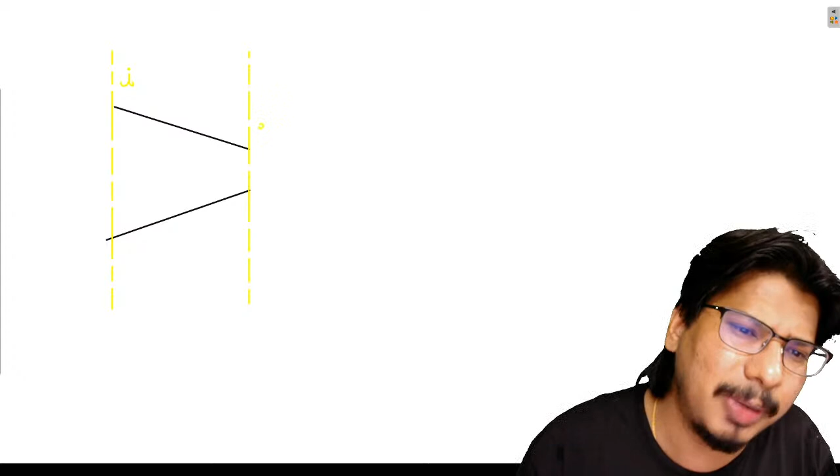Now let us suppose we are having flow through this converging duct, and we are having isentropic flow. Let us suppose we are having isentropic flow. Now listen carefully, my friends.

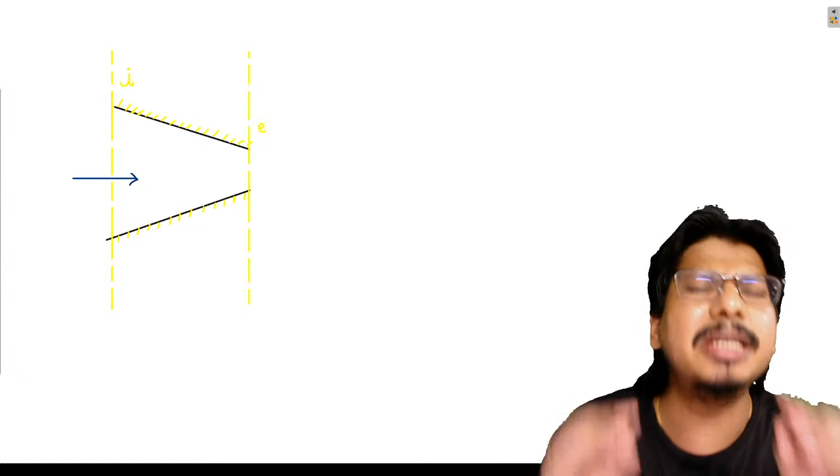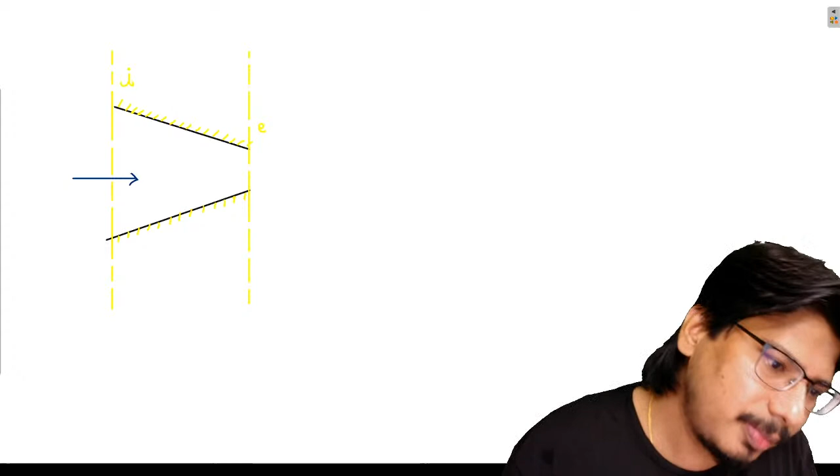For this converging duct, are you able to understand? Where I am having the minimum cross section area?

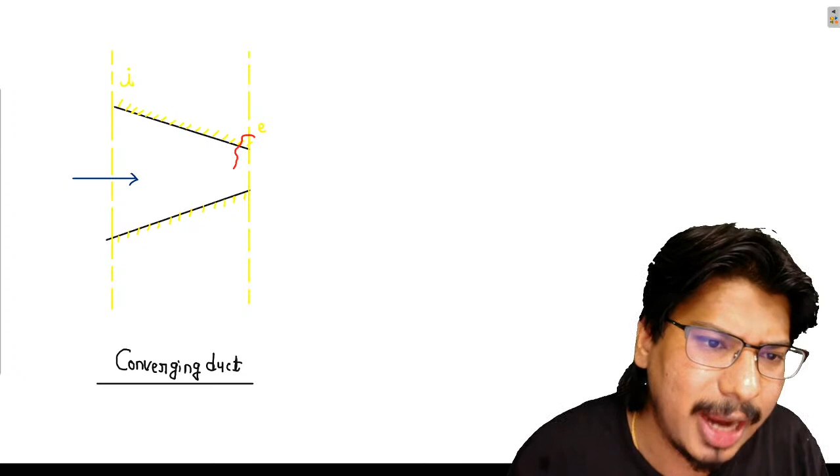Even a blind person can say here at the outlet, at the exit plane of the nozzle, at the exit plane of the converging duct, I will be having the minimum cross section area.

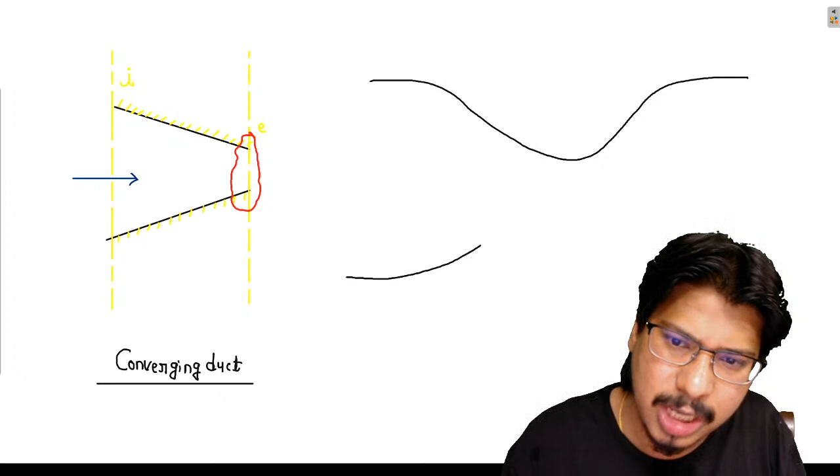Let us discuss one more thing, please observe carefully. Let us suppose I am having converging diverging duct. Look at here. Let us suppose we are having the converging diverging duct.

Now look at here, my friends. You are aware of this. Look at here, the beautiful concept. This is your inlet plane and this is your outlet plane, exit plane. This is the inlet plane of the converging diverging duct.

Observe carefully. This is your exit plane of the converging diverging duct. Any intelligent student of the class, for this converging diverging duct, where will the minimum cross section area occur?

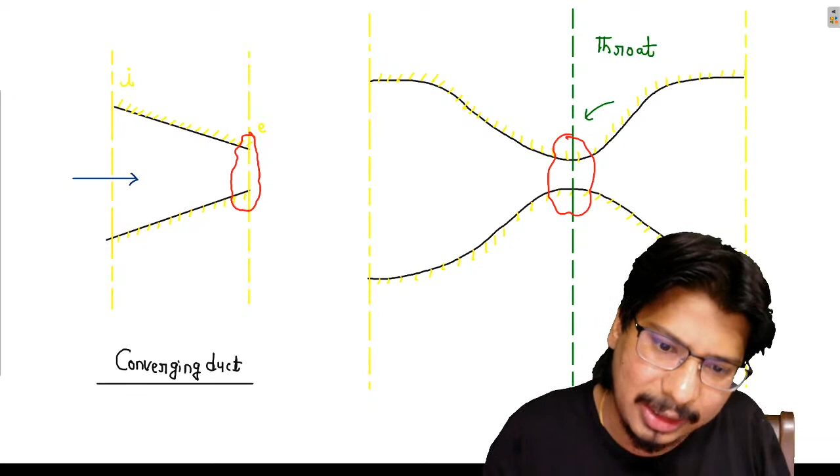Now listen carefully, my friends. What does the formula say? Formula is saying I will be having the maximum mass flow rate through this converging duct or through this converging diverging duct.

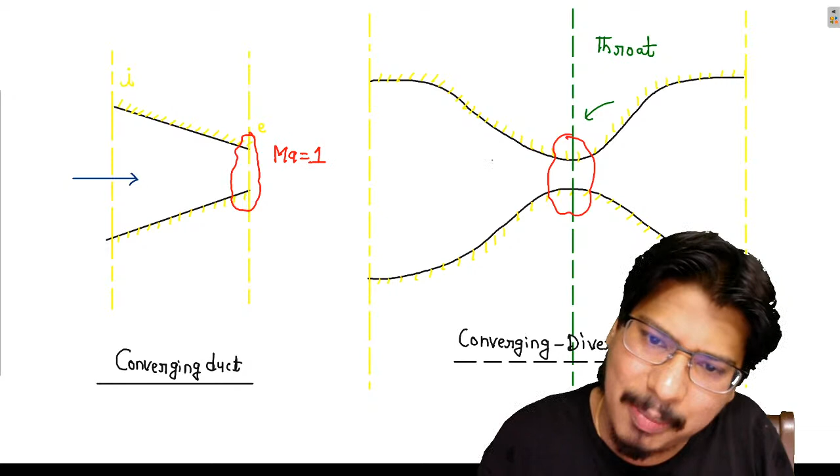If the Mach number is 1, if Mach number is 1 at the minimum cross section area, that means if I am having Mach number equal to 1 over here for the converging duct, or if I am having Mach number here for the throat, I will be getting the maximum, whatever the mass flow rate will be taking place through these ducts, that will be maximum.

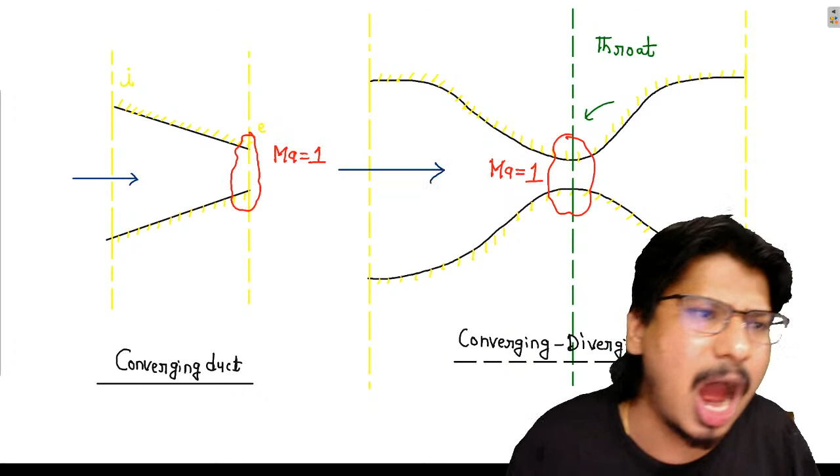I hope everyone is clear. We want Mach number to be 1 at the minimum cross section area.

Bolo re baba, bolo re baba. Good evening, good evening, good evening. Are you clear till here? Yes, Komal, very good. Nikhil, Suresh, Raju, very good beta. Nitesh, Naveen, Shivam, excellent. Namaste. Vikas, are you clear till here?

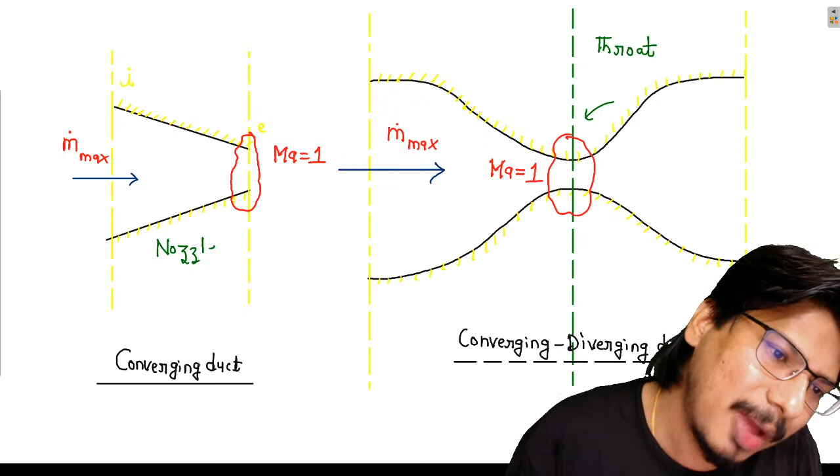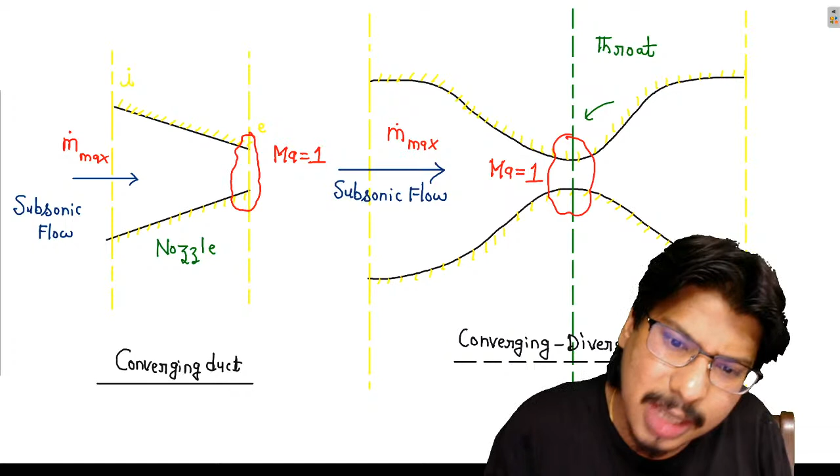If I'm having the subsonic flow here at the inlet, maybe this flow is coming from some reservoir, or I'm having some subsonic flow, then this will be behaving as a nozzle. Similarly here, if I'm having subsonic flow at the nozzle, then 100% this converging duct will be behaving as a nozzle.

Any intelligent student of the class, this diverging duct will be behaving as what? If at the throat, maine bataya hua beta, if at the throat I got Mach number 1, then this diverging duct will also behave as a nozzle, because here also velocity will keep on increasing.

Velocity nahi beta, dhyan se dekho, ye diverging duct - isiliye maine poocha aapko, don't be confused beta. If I am having Mach number 1 here, agar ek baar yahan throat pe Mach number 1 ho gaya, then the velocity will keep on increasing, and at the outlet I will be having supersonic flow. Maine bataya hua hai beta, ek baar dekhna dhyan se.

Supersonic flow, yes or no? I hope you are able to recollect beta. 100% velocity will keep on increasing, and this diverging duct will be behaving as a nozzle. Preetam, welcome. Chalo beta, now the most important thing.

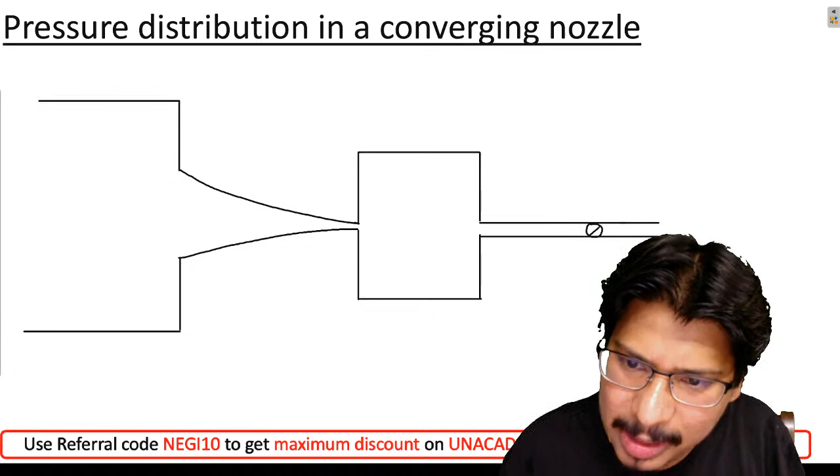Now listen carefully my friends, and let me say here I am having some valve which can regulate the flow. Yahan par mere paas koi valve laga hua hai, and here it is discharging to the environment. Yahan par aapka environment hai, here it is discharging to environment. Now listen carefully. Let me say this nozzle is completely insulated. Beta dhyan se dekhenge.

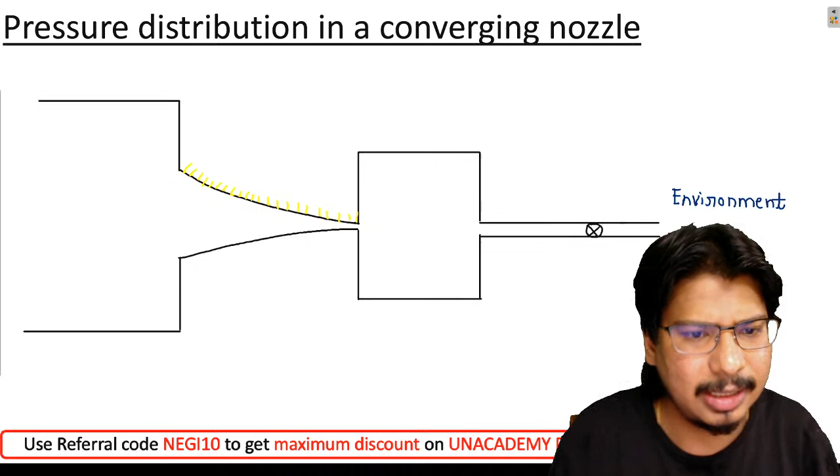Let me say this converging duct is completely insulated. I am having the steady flow. Don't think mass flow rate will be maximum at nozzle. Whatever the mass flow rate I am having at the inlet, same mass flow rate I will be having at the outlet also. Don't be confused. If I am having the maximum mass flow rate, same maximum mass flow rate will occur throughout every cross section, everywhere that same m dot max will occur.

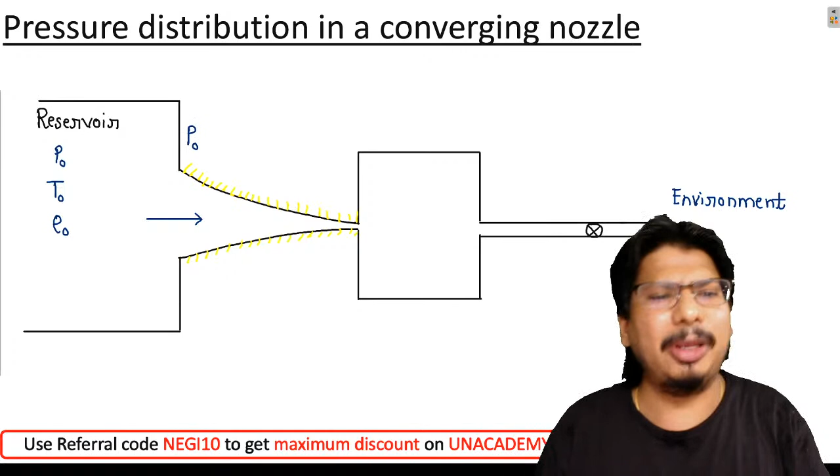Now let me say the pressure at the inlet of the nozzle will be approximately P naught only, you can call it P naught. Now let me say the pressure at the exit plane of the nozzle is PE.

Let me say the pressure inside this tank, this is some tank kind of thing, it is having some pressure, let me say back pressure PB, and this is the valve which can control the flow.

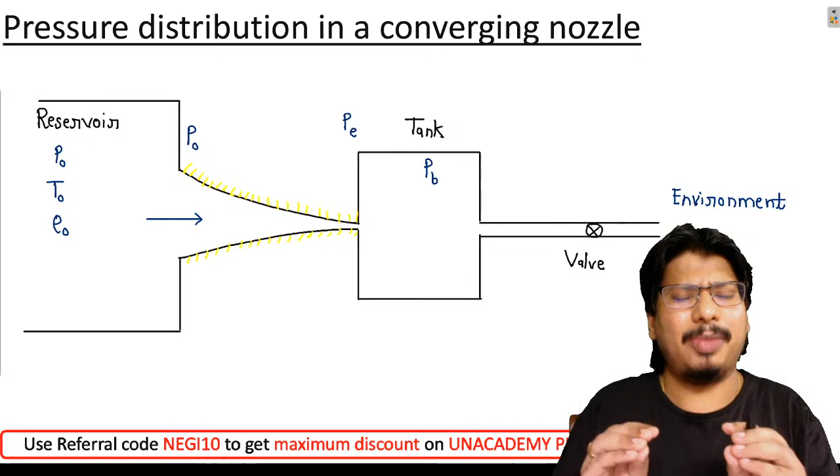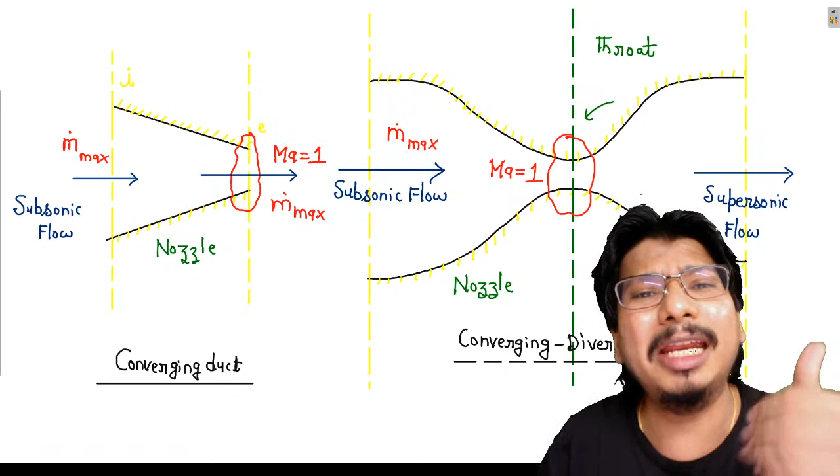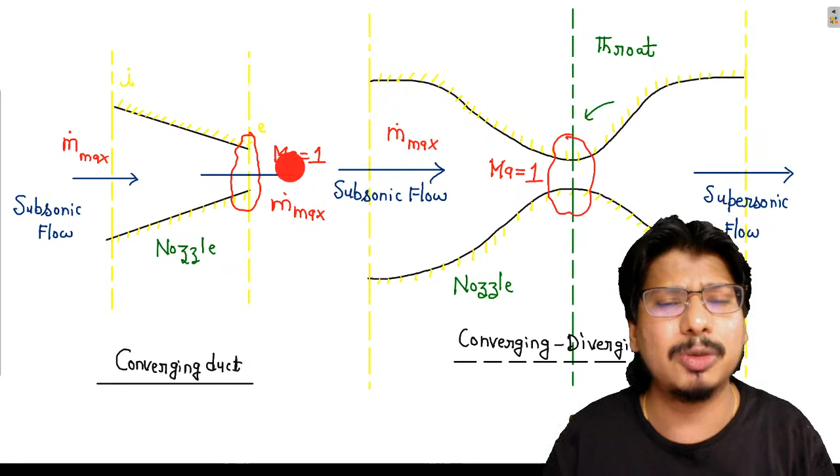Now see how velocity is maintained. I said, if you are having lesser values of Mach number and you keep on increasing the velocity, what will happen? Mach number will keep on increasing. Let us suppose we are increasing the velocity such that the Mach number at the outlet of this converging duct, at the exit plane, becomes 1, then I will be having the maximum mass flow rate.

Let us suppose this valve is completely closed.

What is your observation? Do you think there will be any flow? If the valve is completely closed, do you think there will be some flow? Please confirm me, will I have any flow through the converging duct?

This converging duct will behave like a nozzle right now, because I will be having very low velocities at the inlet of the nozzle, so 100% I will be having subsonic flow at the inlet of the nozzle, or literally zero velocity, right? So I can assume this converging duct will be behaving as a nozzle.

So tell me one thing, what will be the flow? Flow will be zero, there will be no flow. There will be 100% zero velocity.

Let me say this plane is representing the inlet plane of the nozzle. Let me say this plane is representing the exit plane of the nozzle.

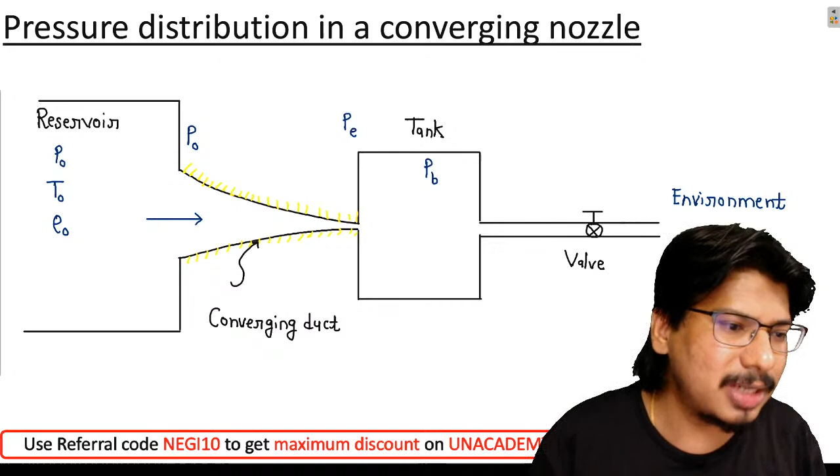Yes, 100%. When the valve is opened, this Pb will decrease. This back pressure will decrease. Let us suppose the back pressure decreases to this value.

So what is going to happen, watch carefully. The fluid will start flowing at the inlet. At the inlet of the nozzle, pressure will be P0 only, but at the exit, pressure will become equal to this Pb1. Let me say when the valve is opened a little bit, back pressure decreases to Pb1. Back pressure will decrease and of course it will be less than P0.

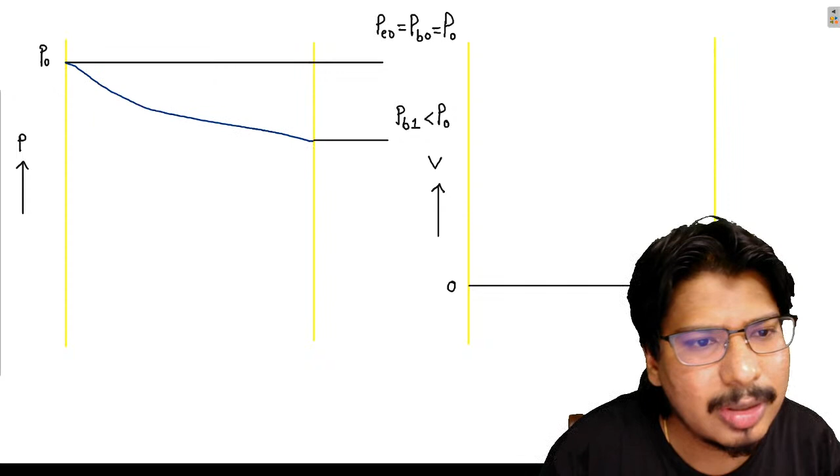The pressure will decrease something like this. Confirm this - yes. Now the flow will start. Flow will start, so 100% velocity will increase.

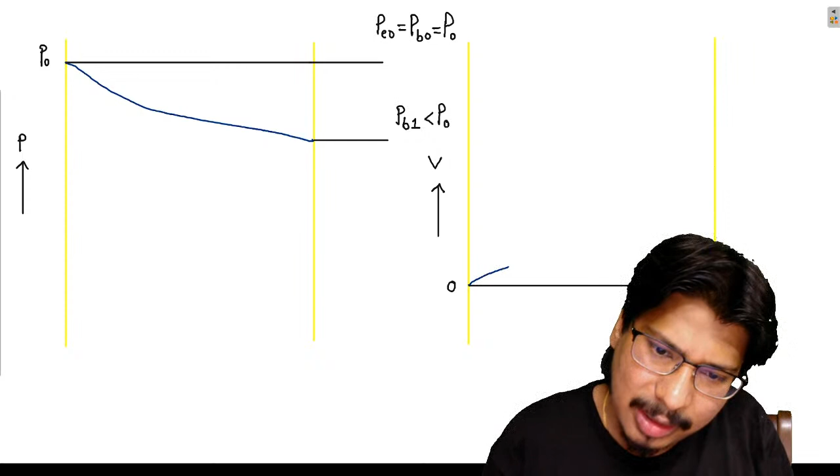So let me say now I am having velocity is equal to V1. Of course V1 will be less than C, but there will be some velocity. Confirm this - is there any doubt here? Please confirm. Of course Pe1 will be equal to Pb1, but it will be less than P0.

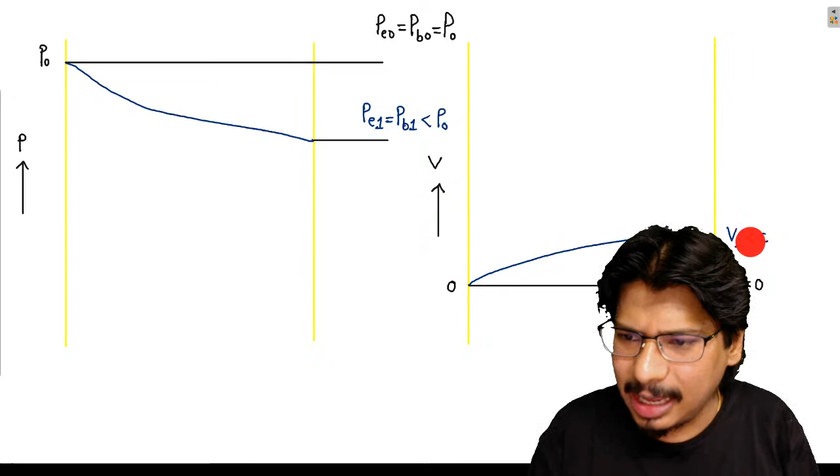In the first diagram I am representing pressure. In the second diagram I am representing velocity. As I am opening the valve, velocity will keep on increasing, increasing, increasing, and it will be less than sonic velocity, sonic speed. Here the pressure will keep on decreasing, and finally at the exit pressure will become equal to Pb1, but it will be less than P0. Clear? Now let us suppose I am opening little more.

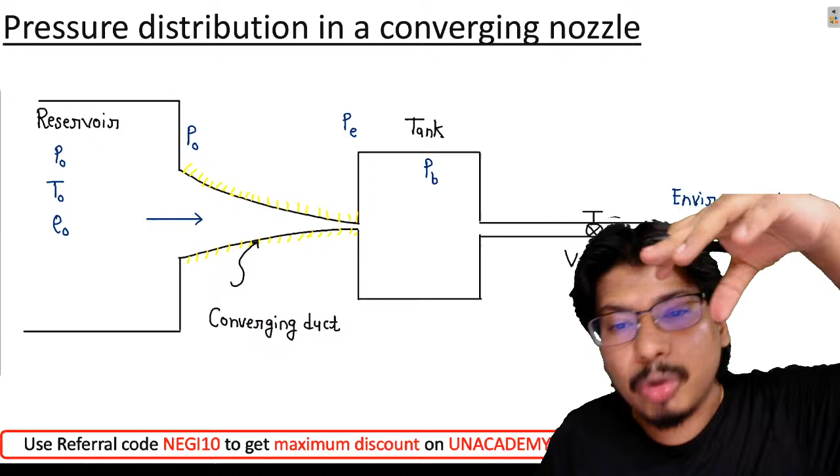If I open a little more and a little more, what will happen? Now if I am opening little more, further the back pressure will decrease. Now let me say the back pressure is Pb2. Of course it is less than P0, there is no doubt. Or you can say it is further less than Pb1.

Now what will happen, watch carefully. Of course pressure will further decrease, decrease, decrease, and finally it will become equal to Pb2 at the exit. And here also velocity will keep on increasing, increasing, increasing, and of course I will be having V2. This V2 will be greater than V1 but less than C.

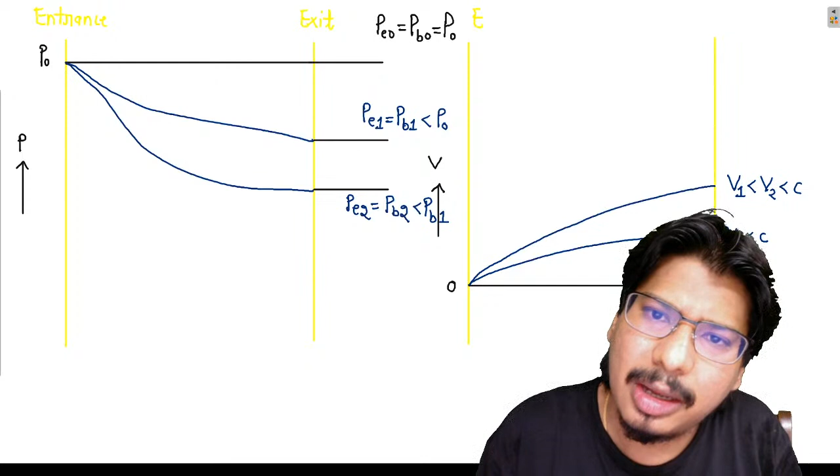Please confirm me. Now let us suppose I am further opening the valve in such a way that - now listen carefully, now the concept is coming. Let us suppose I am further opening the valve in such a way that the velocity of the fluid flow becomes equal to the speed of sound at the exit of the converging duct. Means...

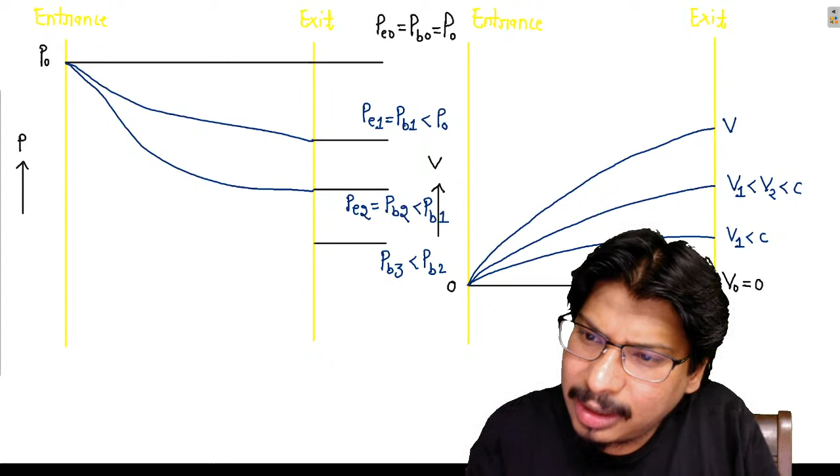Let us suppose I have further opened the valve, I have further decreased the back pressure. Now let me say back pressure is equal to Pb3. Of course this Pb3 is further less than Pb2. Now what will happen? Let me say the velocity at the inlet is 0. It will keep on increasing, and finally let us suppose here the velocity becomes equal to the speed of sound.

Here the Mach number becomes equal to 1. Now what will happen to the pressure?

Observe carefully what will happen to the pressure. Pressure will be P0 at the inlet, but it will keep on decreasing, and finally at the exit, PE3 in this third case will become equal to Pb3, but it will be less than Pb2.

Now listen carefully, the concept is coming. Let us suppose I am further opening the valve. Now what is going to happen?

Now listen carefully. When the Mach number becomes 1, meaning if I have opened the valve such that the velocity of the fluid flow at the exit of the convergent duct becomes equal to the speed of sound, that means the Mach number becomes 1.

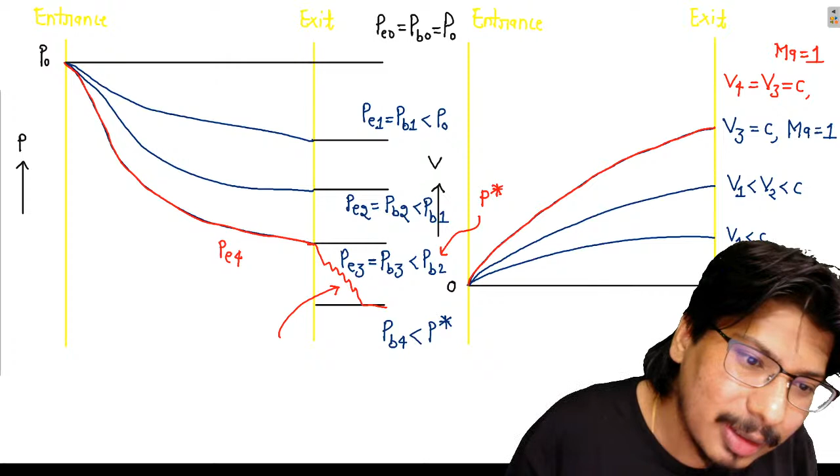PE4, meaning when I am opening further beyond the sonic speed - I have achieved the speed of sound at a certain opening, and I am opening further - then PE4, the pressure at the exit plane of the converging duct, will be equal to PE3, which equals PB3 or P star.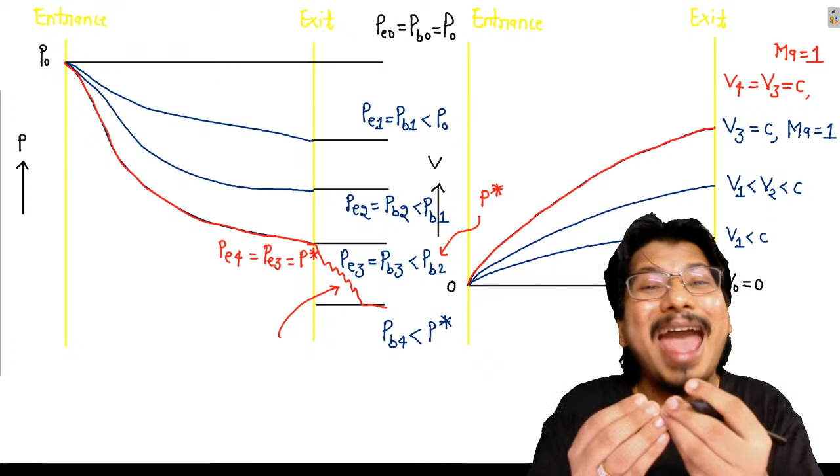It will not change. But as the flow moves forward from the exit plane of the converging duct to the tank, there will be a sudden discontinuity of the pressure. There will be a sudden fall of pressure, and there will be some formation of 3D expansion waves.

Because finally it has to come to Pb4. The fluid has to come to Pb4, but remember, at the exit plane of the nozzle, it will have the pressure of P star only - 3D expansion wave.

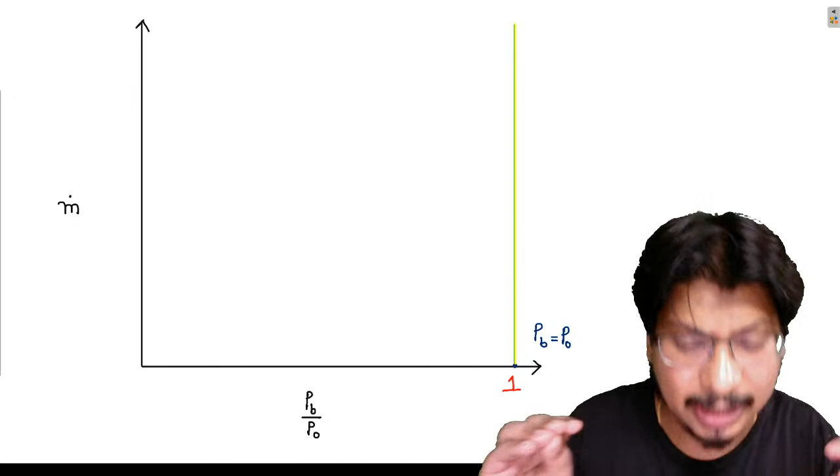When there is no mass flow rate. Excellent, excellent. When the valve is completely closed. Now look here, let us suppose.

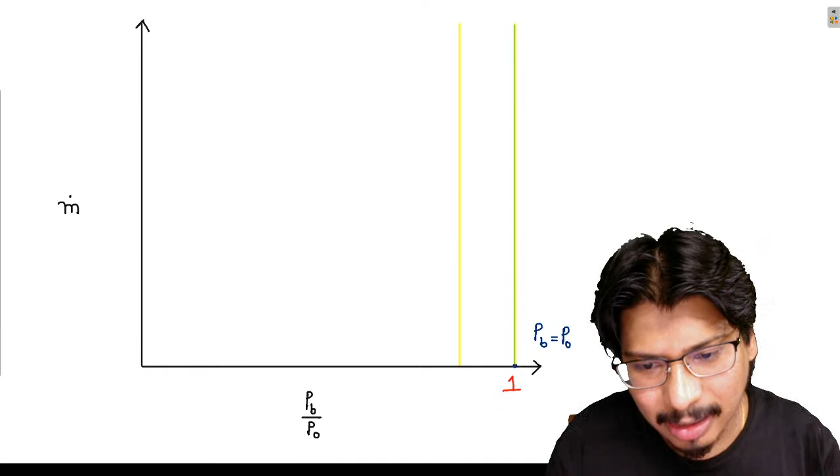Very good. Let us suppose I am opening the valve a little bit. What will happen to the mass flow rate? Mass flow rate will increase. When Pb by P naught is 1, there is no doubt the mass flow rate is 0.

So I am here. Now what will happen? The flow will start. Velocity will start increasing, and if velocity increases, mass flow rate will start increasing. So let us suppose when I opened it a little bit, I reached here.

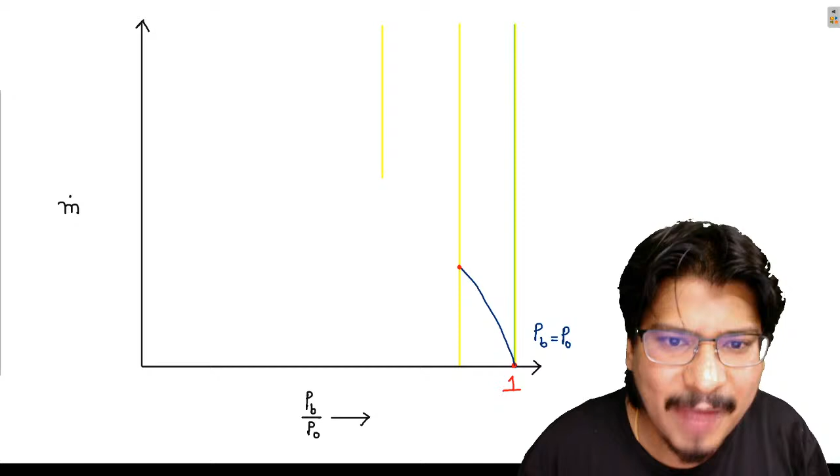Now if I further open the valve, what will happen? Mass flow rate and velocity will further increase. So if I am opening the valve a little bit more, Pb is decreasing now, Pb is decreasing.

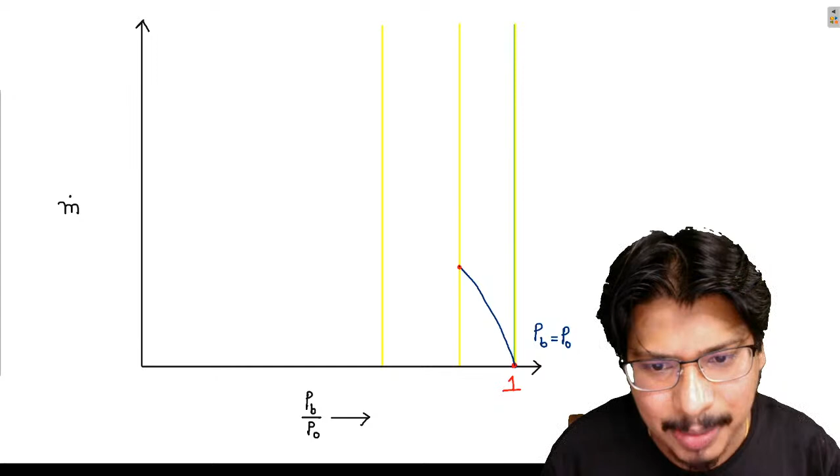Pb by P naught is decreasing, mass flow rate is further increasing. Now let us suppose in the next case I am opening the valve in such a way that the velocity of the fluid flow becomes equal to the speed of sound. Now what will happen? Next stage, mass flow rate will further increase.

I'm showing you each thing one by one. Mass flow rate will further increase, and at this point your Mach number will become equal to 1.

Now if I am further opening the valve, what will happen? Pb will further decrease. If Pb further decreases, Pb by P naught will further decrease. But what will happen to the velocity of the fluid flow? It will not increase, and if it doesn't increase, mass flow rate will not increase.

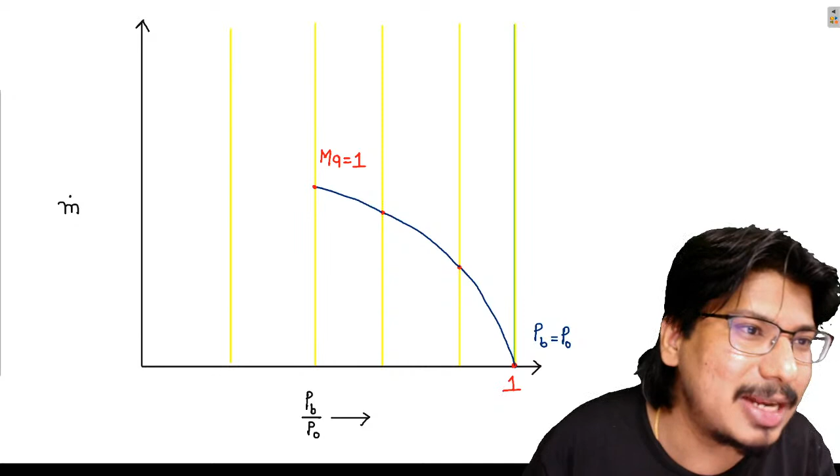That means from here it will be like this, from here it will be like this. Oh my god, that means this is your maximum.

Is it clear, crystal clear? I am going very slow in this concept because many people have a lot of doubt here. That's why I want you to be crystal clear in this. I hope everyone is crystal clear with this. Are you clear till here?

Excellent, excellent, beautiful students. Are you clear? Look, look, look, this is the case when the valve is completely closed.

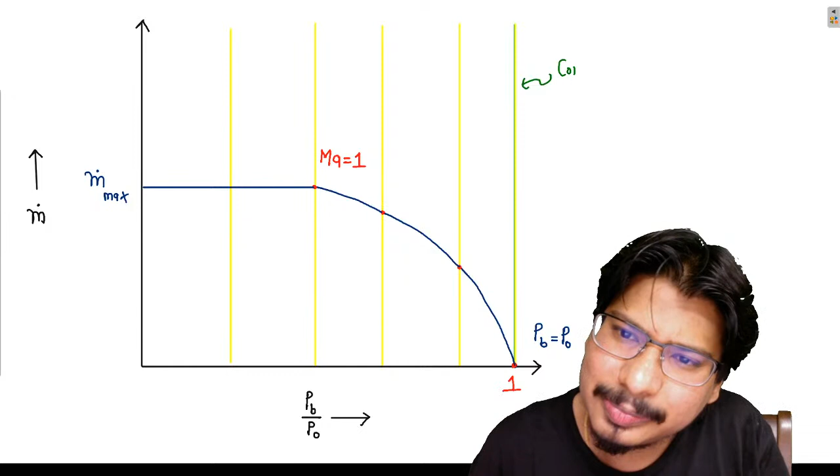When the valve is completely closed, mass flow rate is 0.

I opened the valve a little bit. Pb decreased, velocity increased, mass flow rate increased. I further opened the valve. Pb further decreased, mass flow rate further increased.

But now let us suppose I am opening the valve in such a way that now I am having the sonic velocity of the fluid flow. That means the velocity of the fluid flow is equal to speed of sound. Now my Mach number is 1. If I further open the valve,

Now the things are not going to change.

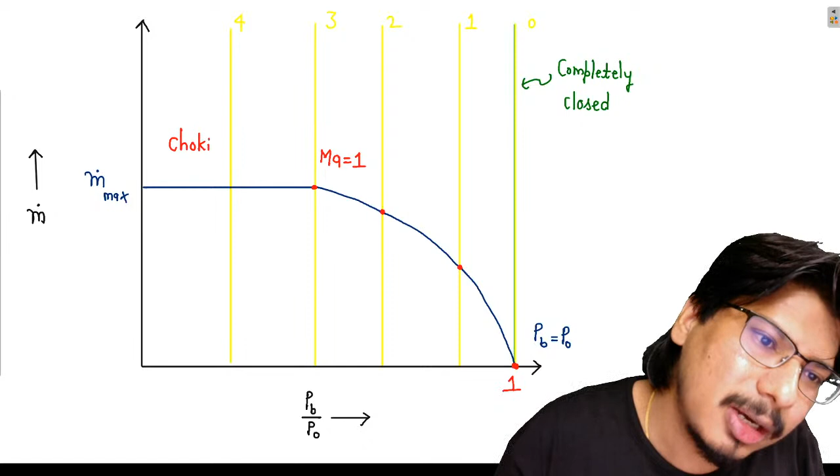Such a situation, when we are having the maximum mass flow rate through the converging nozzle, we are calling it choking in nozzle. We are calling it choking in nozzle, and such flow is known as choked flow.

Are you clear till here? Tell me, tell me.

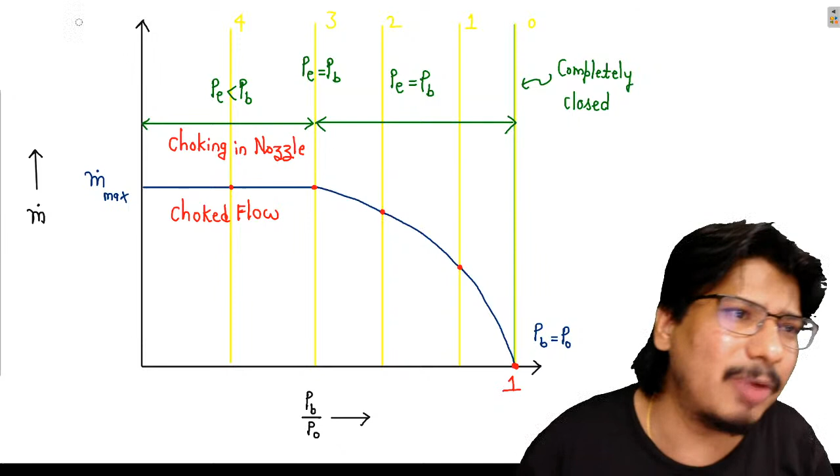Now any intelligent student of the class, look here, Mach number became 1. I am writing here, you are having Mach number 1. Here you got Mach number equal to 1.

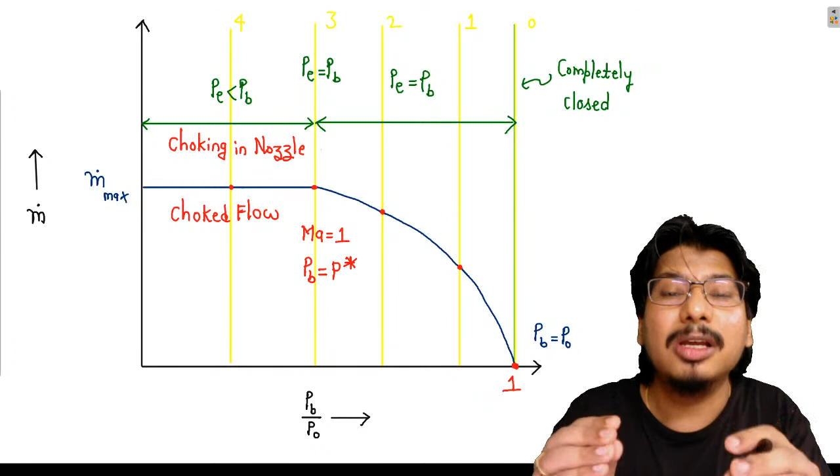If Mach number is equal to 1, what is the meaning of that? Pb is equal to what? Back pressure is equal to what? Back pressure is equal to sonic pressure. Back pressure is equal to sonic pressure. You can say sonic pressure or you can say critical pressure. There are two names. Back pressure will be becoming equal to sonic pressure or critical pressure.

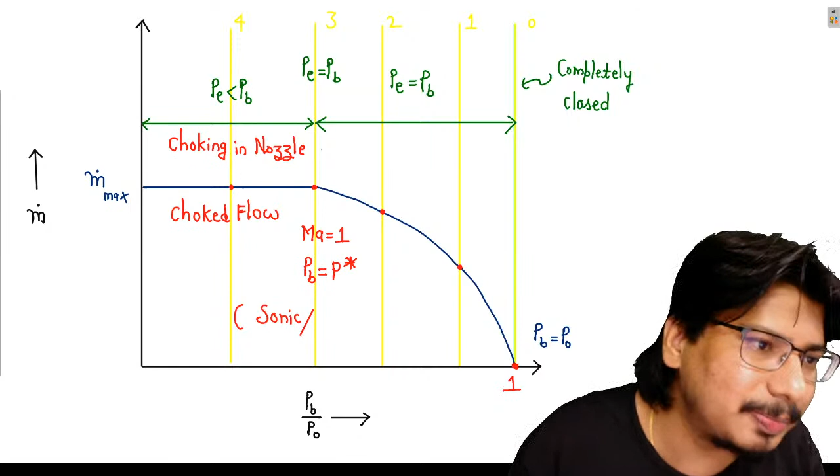Now any intelligent student of the class, I am asking you one question. I am asking you a question, I don't know how many people will be able to answer.

Can you tell me what will be this value of Pb by P naught? What will be the value of Pb by P naught here? Tell me, what will be the value?

I have given you the formula, haven't I? What is the formula I have given you? If you remember, P naught by P star is equal to gamma plus 1 by 2, whole power gamma upon gamma minus 1.

So what will be P star by P naught? P star by P naught will be how much? 2 by gamma plus 1, power gamma upon gamma minus 1.

For gamma is equal to 1.4, what will be the value of P star by P naught? If you solve it, 2 by 1.4 plus 1, that is 2.4, power 1.4 divided by 0.4.

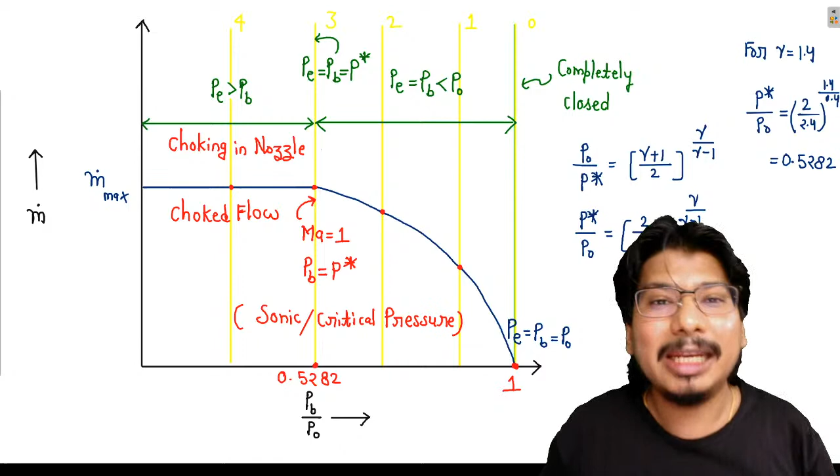Let me explain what I am saying, listen carefully. What I'm trying to tell you, listen carefully. Let us have the crystal clear concept. Look here, my friends.

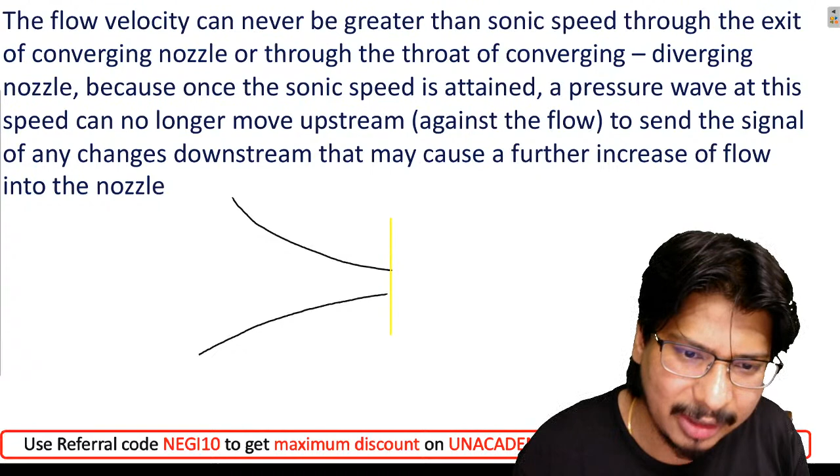Once the fluid is having the velocity of speed of sound, let us suppose here the velocity of the fluid flow becomes equal to the speed of sound. Now if I'm decreasing the back pressure here...

The pressure wave will not be able to travel to this upstream part. That signal will not be able to reach the inlet, this pressure wave will not reach here.

And the signal will not reach that the pressure has been decreased, so you start increasing the flow. Look here, try to understand. Once the sonic speed is attained, a pressure wave at this speed can no longer move upstream against the flow to send the signal of any changes downstream that may cause a further increase of flow into the nozzle.